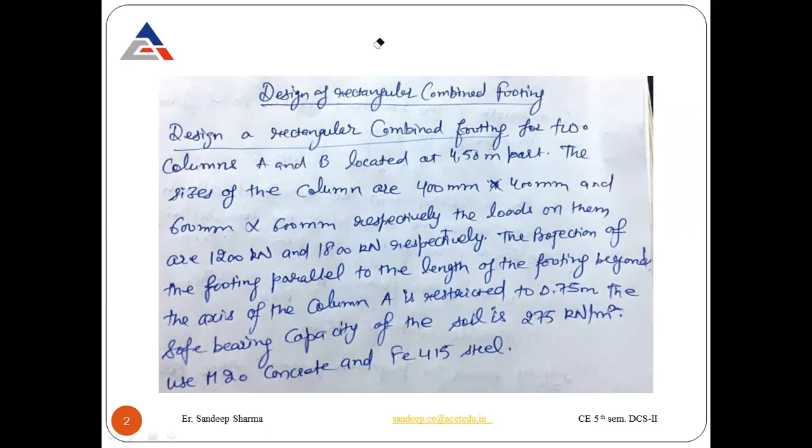So here you can see we have these two columns A and B, and this whole length we will calculate - we only have this data available: 4.5 meter center to center between columns A and B, and the 0.75 meter projection on the left side of column A. We also have the two loads, 1200 kilonewton and 1800 kilonewton. We have to design the other dimensions, like the whole length, because only the center distance and this projection are available, but we have to design the complete cross section of the footing.

Okay, so let's see how to design that one.

So in step number one, we have the two loads on the columns, 1200 and 1800, giving a total load of 3000 kilonewton. The approximate weight of the footing is considered as 10% of the total column load, which equals 300 kilonewton. So the total load is 3300 kilonewton, and the safe bearing capacity is 275 kilonewton per meter square.

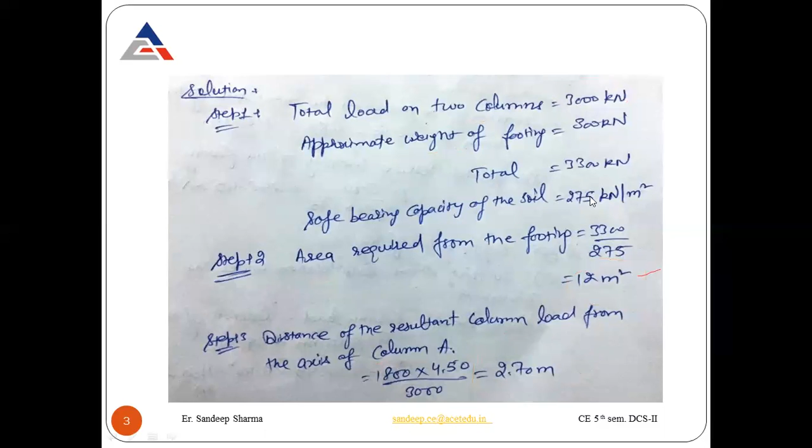And the next step is the distance of the resultant of the column load from the left edge of the footing. What is the left edge of the footing? This is the projection available to us, that is 0.75 meter from the left edge of the footing, and we get 2.70 meters from the previous step - this is the resultant of the column load from the axis of column A.

So the total length we get is 3.45 meter from the left edge of the footing. This is the resultant of the column load from the left edge of the footing.

This is the resultant of the column load from the axis of column A. When you add both these, you will approximately get the center of the footing, for the condition that the resultant column load should act at the centroid of the foundation plan.

We consider that it will lie at the center of the foundation plan. So for the length of the footing, if that is the center, when you twice this length, that will be the total length of the footing. This is how to get the length of the footing against the area required.

The area required was 12 meters square. When we calculate the resultant load from the axis of column A, and add it with the projection from the left edge of the footing, this gives approximately half of the length of the footing, assuming the load acts at the centroid of the foundation plan. When you twice this one, you get the whole length of the footing.

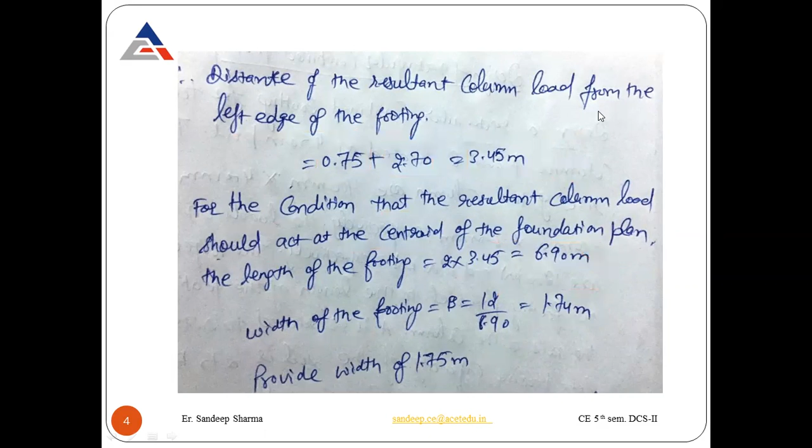Now you can fix this basically as the centroid that we get after adding this projection of 0.75, and this is the distance of the resultant load from the axis of column A, and this was the projection. When you add both these, you get 3.45 meter, and when you twice this, you get the total length, 6.90 meter, and the width of the footing is 1.75 meter, against the area required.

Is that clear up to this step? Yes sir, yes sir.

Then we have the next step, that is to show the position of the column on the footing. This is the projection of the footing on the right side of the column, that is column B. You get this projection of 1.65 meter on the column B side.

This projection was given; now you will get this because this one is half of the length, that is 3.45 meter. Again considering the same here, you get this length when you subtract 1.80 meter from the center of the axis of column B. This is the distance when you subtract, you get this projection.

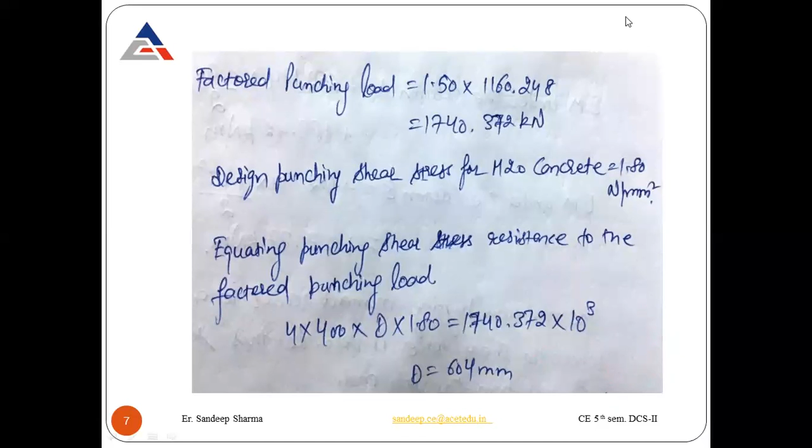The punching shear consideration under column B. There the punching load we have is 1800 kilonewton, and this is the net upward pressure intensity under column B, with the column size 600 into 600 mm. Again, this is the factored punching load multiplied after the partial safety factor, and equating with that, this is the overall depth that you will get under column B.

Now these were the punching shear considerations for both column A and B.

Now against the bending moment consideration, the factored load under column A will be 1.50 multiplied, giving us 1800 kilonewton, and the factored load under column B will be 2700 kilonewton.

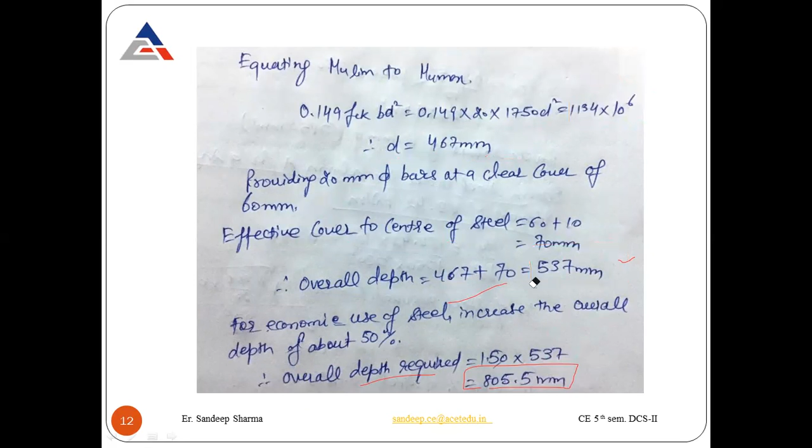So provide an overall depth of this, now the actual effective depth that you can calculate after subtracting the effective cover. So this is the actual effective depth which we have to provide, it is 730.

Now we can calculate the reinforcement from the bending moment consideration. So this is the cross section area we have, D and B here, and this is the maximum hogging moment. Against that we can calculate the percentage of steel, that here we are getting 0.605%.

Then the area of steel against that, so the 20 mm dia bar which we decided to provide here, and against the area of steel we can provide 25 numbers of 20 mm dia bar, and the bottom steel under column A for a sagging moment. So this is the steel that you can provide in between, where we have the maximum hogging moment between column A and B.

Now for the sagging moment, the bottom steel under column A, the moment there is 183.42 kilonewton per meter, which we calculated in the previous step, that you can see. So these are the two moments that we calculated, that was 183, the bending moment under column A and bending moment under column B. So against this bending moment consideration, we can calculate the percentage of steel and area of steel. Is that clear?

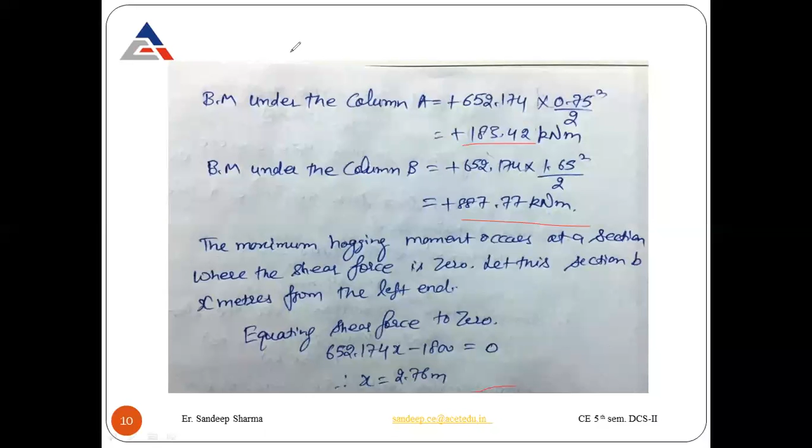So this one is, yes, in this condition. So we calculated the area of steel in between these two axes of the column, where we have the maximum hogging moment against that. So this is the point where the bending moment will be 0, and in between there will be the maximum bending moment.

So against that, we calculated first the percentage of steel and area of steel, and now we are going to calculate the bending moment, the percentage of steel under column A and under column B.

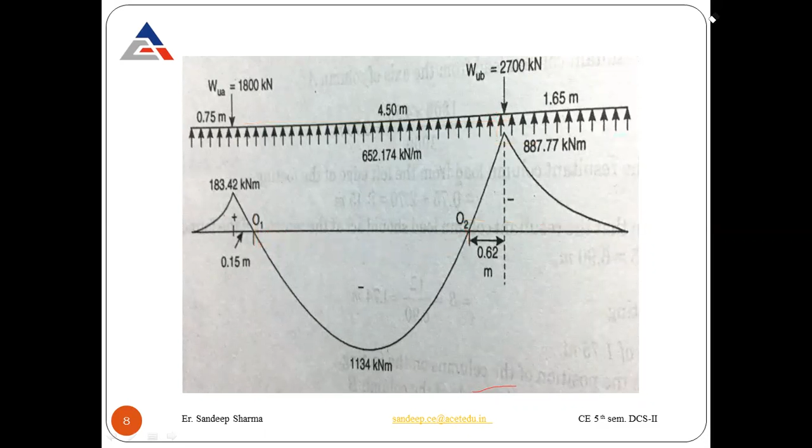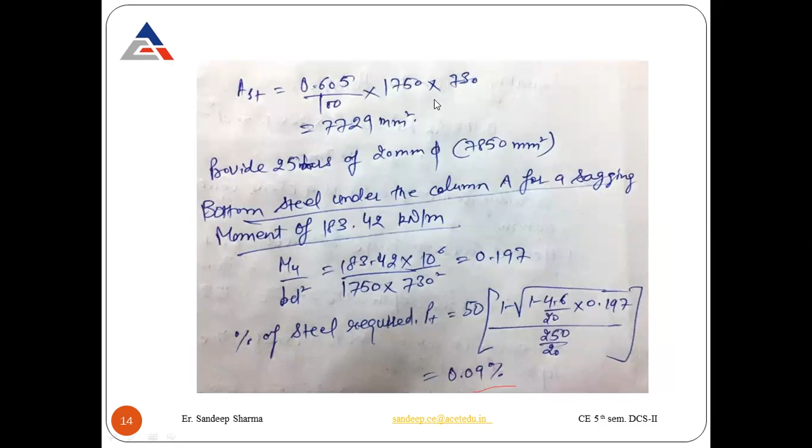Okay, so we were there, under the column A. This is the bending moment under the column B that we can calculate with the help of this. This is the actual effective depth, and we need to use the same cross sectional area for both conditions A and B.

This is the area of the steel that we are getting here, 5941 mm square. Now the shear force analysis that you can also get.

So this is step number 8. The shear force on the left hand side of the column A, that is the reaction due to the net upward pressure, the reaction of the length of the footing due to the column load that we calculated in the previous step. So on the left side of the column A, we have this projection that is 0.75 meter, and against that, the shear force on the left hand side of the column will be this.

Then we have the shear force on the right side of the column B again, that will be - sorry, this one is the left side of the column B, and this is the reaction there, and this is the projection from the left side of the column B.

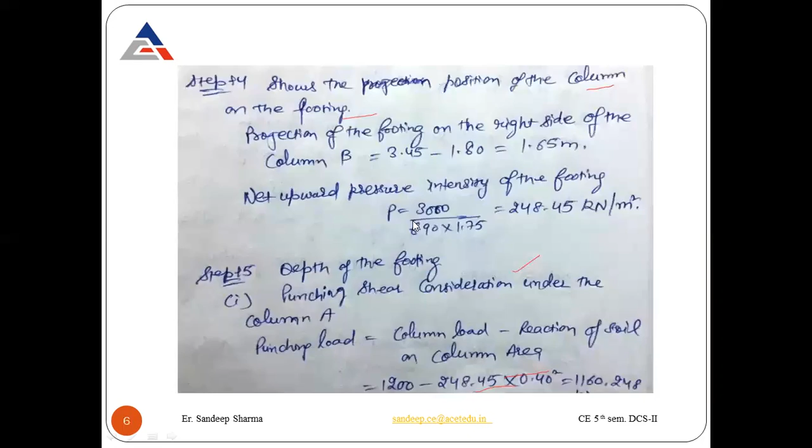And the cantilevering part - now we have to design the cantilever part. So basically this is the cantilever part of the footing that we have, that you can see here, from the axis of the column up to this point.

So how to design this cantilever? First we design this portion in between where we have the maximum hogging moment. Then we design the steel under the column A and under the column B. Now we have to design this cantilever part, this projection there.

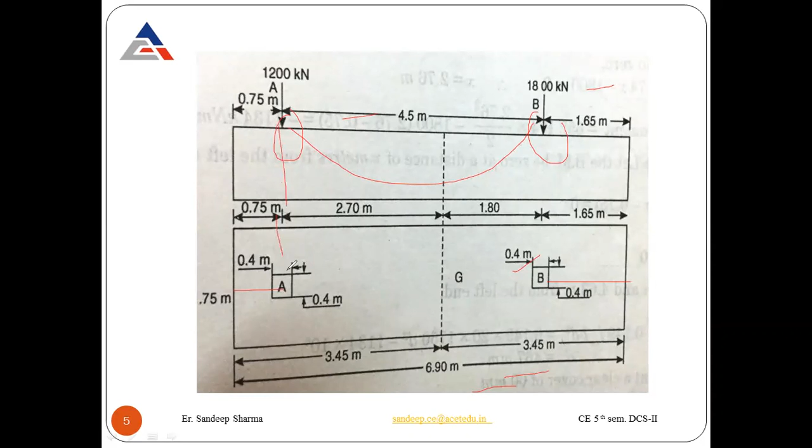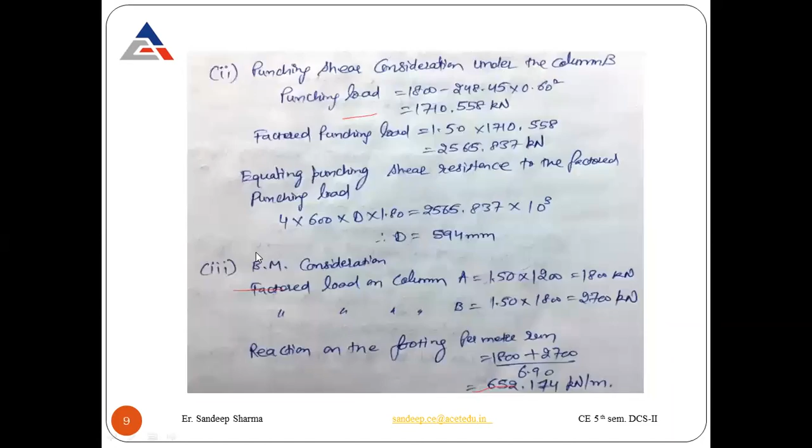So this is the cantilevering part. The critical section for the shear is taken at a distance equal to the effective depth from the face of the column. So what will be the critical section in this cantilevering part?

So the critical section that we will consider is up to the distance that will be equal to the effective depth. We will consider basically from the face of the column that distance, and that distance will be equal to the effective depth, for the cantilevering part on the left side of the column A.

So the cantilevering part beyond the column face, that is 0.75, is basically the projection that was given to us, from which you will subtract half of the width of the column. So this is the distance that you will get here, 0.55 meter. This cantilever part is 550 mm, but the effective depth there is 730.

So that we can provide here the nominal 8 leg and 10 mm diameter stirrups for the column under column A against this effective depth. So this is directly, we basically calculated the reinforcement of this projection, in which we have to provide the 8 leg stirrups, that will be 10 mm diameter with the spacing of 300 mm center spacing, that I will explain in the next slide.

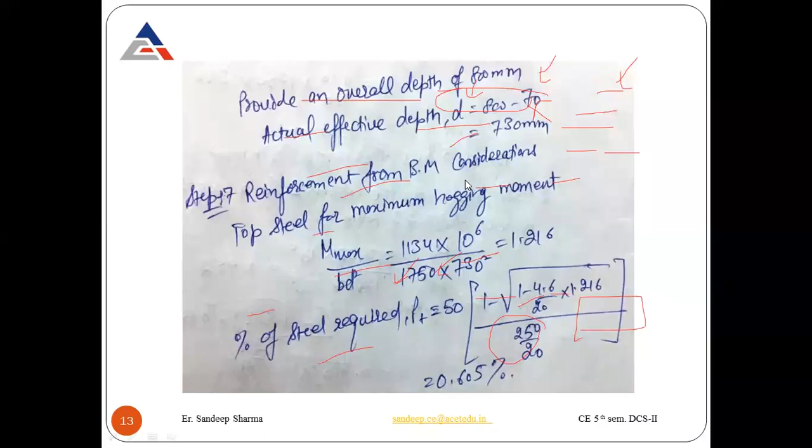So the percentage of the steel provided against that. So this is basically the area of steel, that is 5966 divided by B into D into 100, which we calculated in the previous step. That was 5941 there under column B.

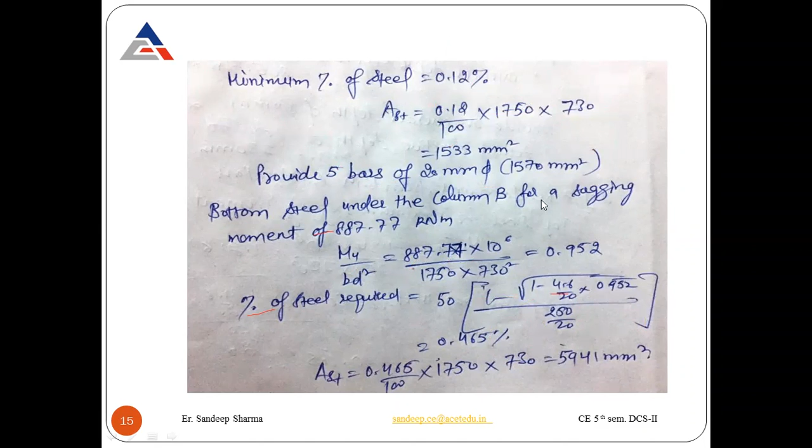So the footing between the two columns. So the percentage of steel, that here we are getting against the area of steel there, and 5966 that we are considering, that is near about 5941 divided by B into D into 100. And against this percentage of steel, we can calculate tau c.

Now we can compare both these values. Here we can see the tau v, which is less than tau c. It means the nominal shear stress is less than the shear strength of the concrete. So we can say that minimum shear reinforcement can be provided here.

If the value of tau v is greater than tau c, actual shear reinforcement is needed. But now tau v is less than tau c, so minimum shear reinforcement can be provided in the form of 8-legged stirrups with 10 mm dia bar at 300 mm center spacing, same as provided on the projection on the left hand side of column A.

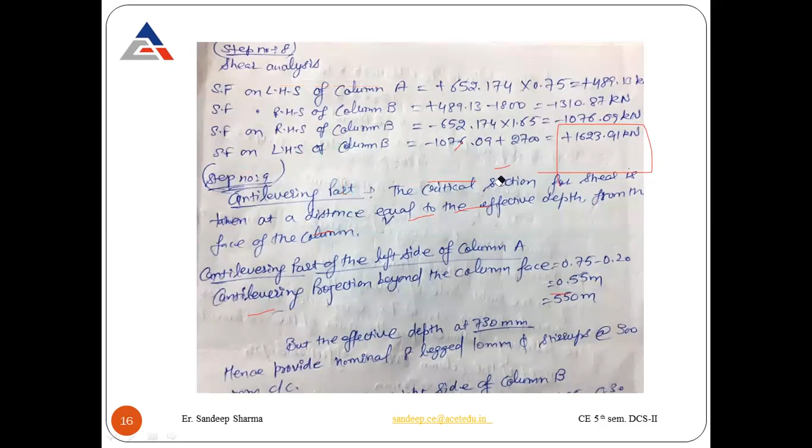So this is then the footing between the two columns. Here, for the footing on the right side of column A, the critical section should be considered at the lesser of the following distances from the axis of column B: half of the column size plus effective depth, or distance up to the point of contraflexure.

The distance up to the point of contraflexure was 150 mm, and half of the column plus effective depth was 200 plus 730, giving 930. So the critical section is taken as 0.15 meter from the axis of column A. The shear force at this critical section was 1310.87. So this is the projection here, 2.01, the total projection we have.

And the nominal shear stress here we are getting is 0.95. Percentage of steel is 0.61. So against that, again we need to check the value of tau c, that is 0.51. So the shear resistance of the concrete, tau c into BD, that is 0.51 into the cross section area.

And then the shear force at a distance, the shear force occurs at a distance of 1 meter. The point of zero shear is 1.10 meter from the axis of column A. The net shear force for which the shear reinforcement is required, this is the total reaction there, that we calculated in the previous step, that is 1213.04.

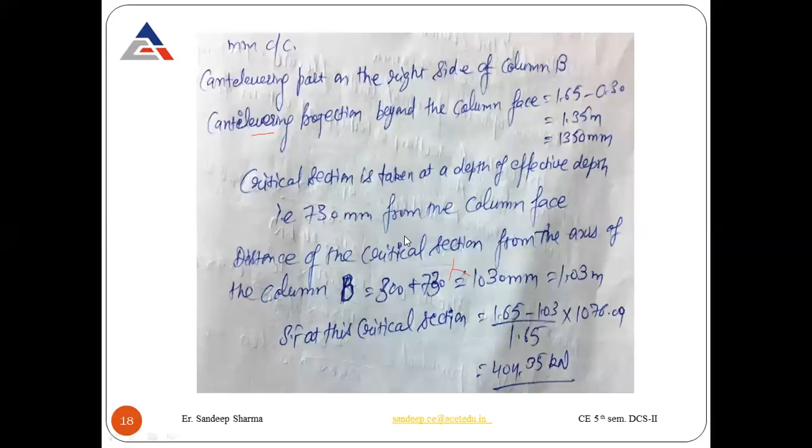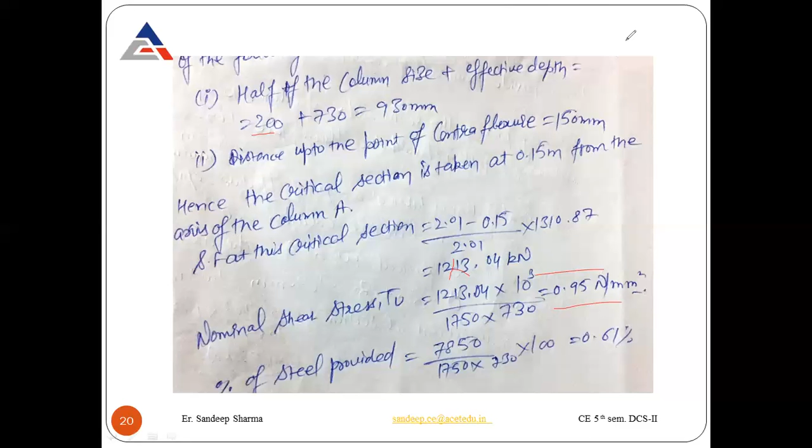So here we are getting this net shear force for which the shear reinforcement is required. So here we have to design. Why do we need to provide shear reinforcement here? Because the nominal shear stress, that is 0.95, which is more than 0.51. So that's why we will go for the design of the shear reinforcement.

So against that, we need to calculate the total shear force, and against that we need to design the shear reinforcement. First we calculate the shear that will be taken by the concrete. So this is the shear strength of the concrete, this is the cross section area, and the shear force occurs at a distance.

So which distance will that occur at? This is the shear resistance that will be taken by the concrete, divided by the shear force, at the distance of 2.01, including the projection.

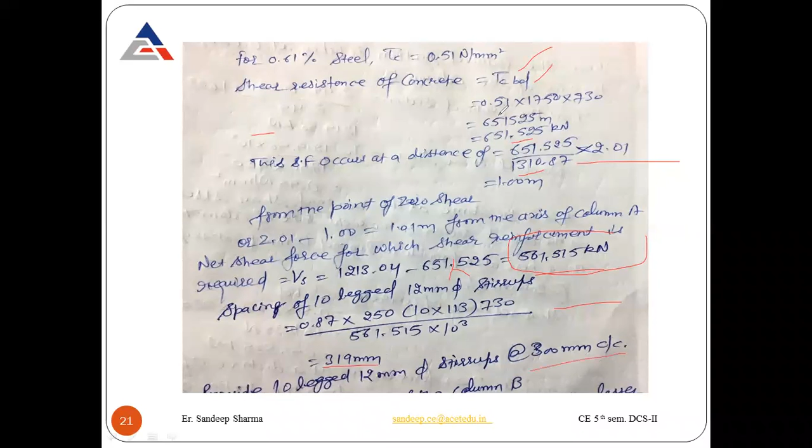So 1.01 meter from the axis of column A is the net shear force for which the shear reinforcement is required. This total net shear force we are getting here is 561.515 kilonewton. Against that, the spacing is 319 mm, and we will provide 10 legged 12 mm dia stirrups at 300 mm center to center spacing.

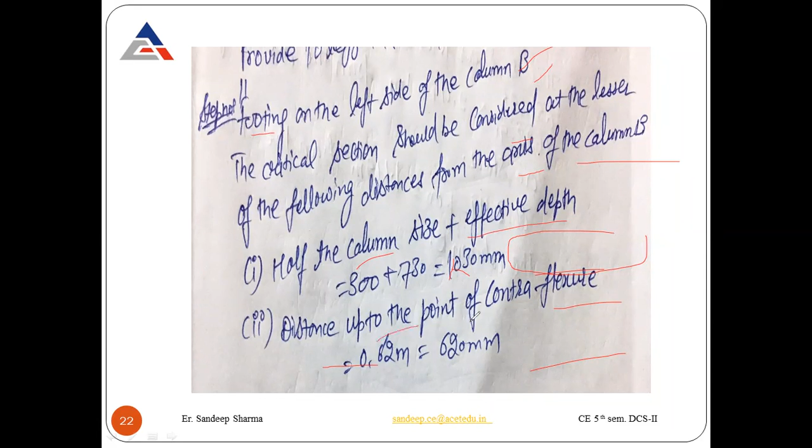And the footing on the left side of column B - the critical section should be considered at the lesser of the following distances from the axis of column B: half of column A, half of column B, and effective depth, and the distance up to the point of contraflexure, that is 620 mm.

So same as we calculated in the previous step, the shear force at the critical section here we are getting 1219.58 kilonewton, and the nominal shear stress, that is VU upon BD, is the same as the nominal shear stress at the critical section on the right side of column A.

So now again, the 10 legged 12 mm dia stirrups at the rate of 300 mm center spacing that we can provide here, with the shear resistance of the concrete being 651.525 kilonewton.

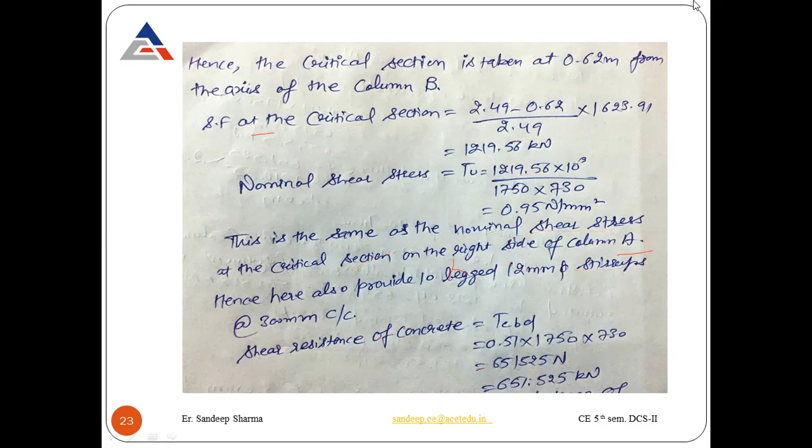Again the same that we will get here, and this is the shear force occurring at a distance - this is the projection we have, 1 meter from the section of zero shear. So the remaining that we will get is 1.49 meter from the axis of column B.

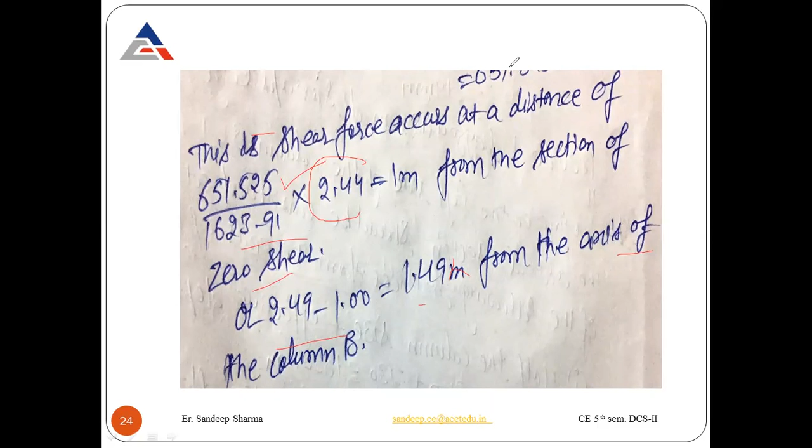So from this calculation you will get this figure. When you divide it, the maximum shear is in between 1.010, and these two sections in between we have 1 meter, and again 1.490 meter here, where we have the maximum shear force. So from this distance, the maximum shear force is at 1.010 meter, and from this, 1.490 meter.

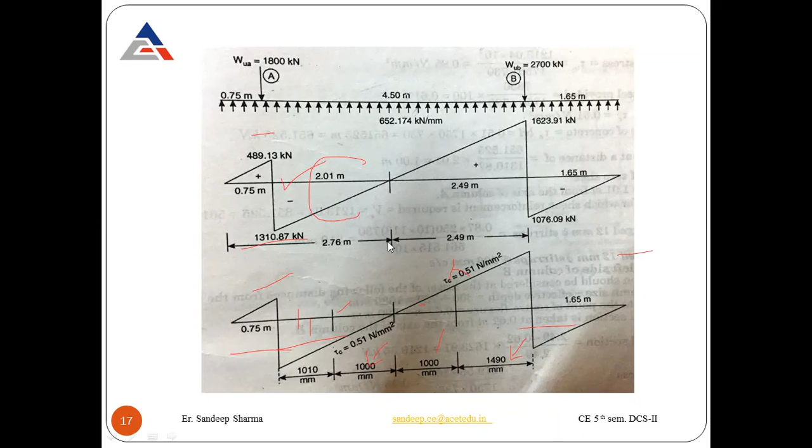And these are the projections that we designed there. So this is the figure that you will get at last here.